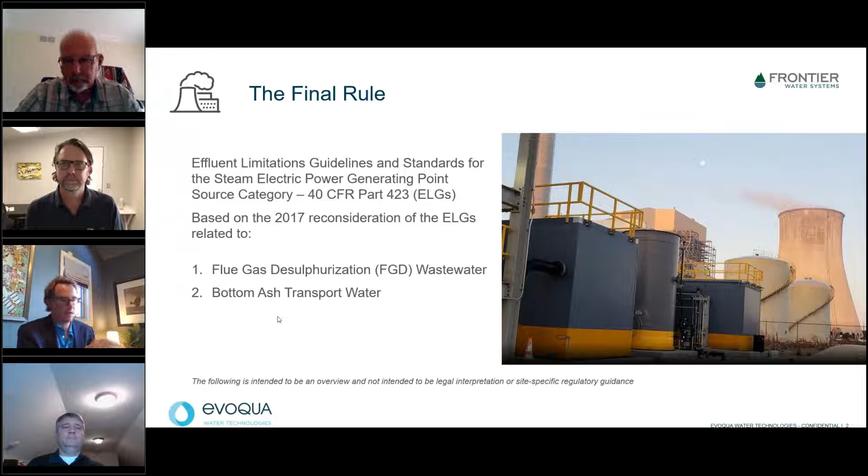A significant change in the rule is the definition of what constitutes a low utilization boiler. The EPA modified the standard from an output value to a capacity rating. The EPA went on to estimate that this would change the viewpoint for 66% of the utilities who are planning to use this exemption. The rule maintains the exception for very high flow systems, although there are very few of those, and those have committed to retirement by 2028. We confirmed the option for adopting tighter standards as part of the voluntary incentive program, based again upon the adoption of membrane-based technologies.

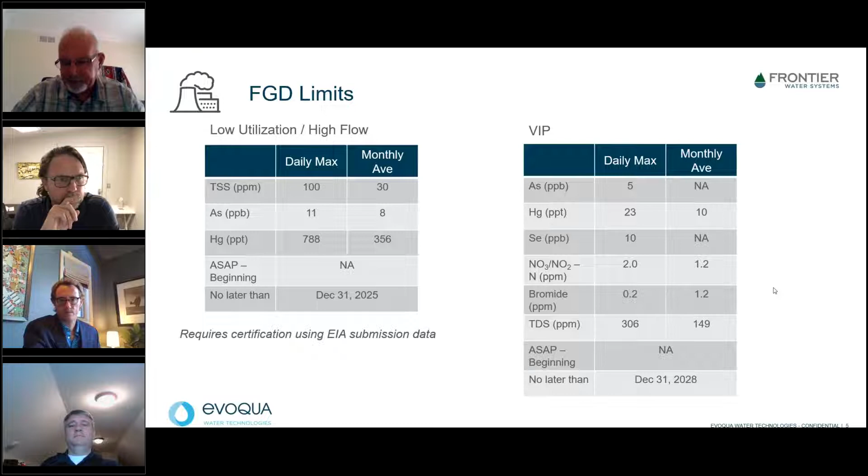While maintaining the recommendation to use membrane-based technologies, the EPA commented, while there are many pilots underway, there is not a full-scale system operating in the US at this time. An additional comment was that more development is needed to handle the brine waste generated by this approach. Now I would like to turn it over to our colleague, Kevin McDonough from United Conveyor Corporation, to discuss the rule's impact on bottom ash transport water.

Chuck, can you hear me? Yes, we can. Okay. I'm going to jump into this, and we're just having a few connectivity issues, but we'll roll from here. All right. Thanks, Chuck. Appreciate it. Thanks, everybody, for joining us today.

One of the things that we wanted to touch on was just showing the intent of the EPA to have some harmonization between the coal combustion residual rules and the effluent limitation guidelines, specifically as they pertain to bottom ash transport water. So one comment I want to make is some of the urgency that's noted about that new cease receipt of waste deadline of April 11th, 2021 for formerly clay-lined or unlined impoundments.

As those of you that understand what the timeframes typically are for these projects know, to complete a wet-to-dry conversion project in 6 months is borderline impossible, if not impossible. But obviously there is an application for extension for a longer time period that reaches out to 2023 or 2024. So that being said, it goes into the ELG, which is also expressing some urgency of as soon as possible, but not later than December of 25. And obviously a lot of those details are going to have to be worked out with the permitting authorities.

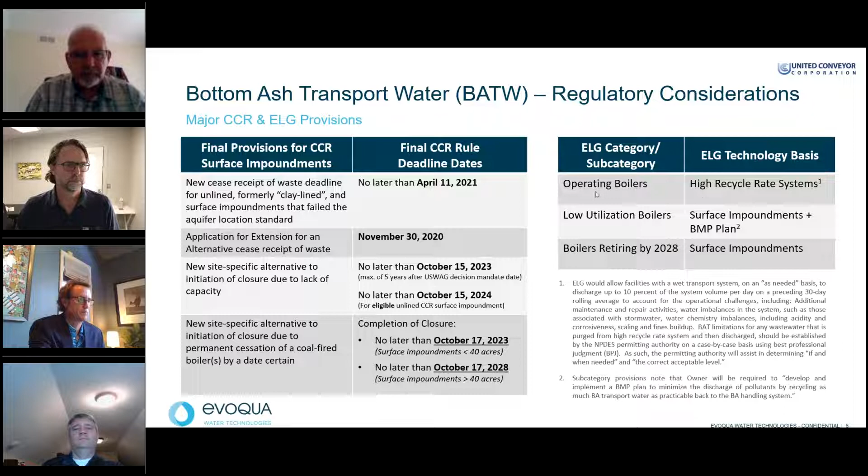And of course, in the last group, the boilers retiring by 2028, you can continue to use your surface impoundments, provided your surface impoundments are in compliance with the CCR rule. So switching over to some of the solutions, and I won't go into too many details on the next slide, but as most of the individuals that have done work on or gotten into the preliminary phases of bottom ash projects know, we have a number of options for bottom ash transport water wet to dry conversions, which would provide for CCR and ELG compliance.

About 75% of the fleet is done, pretty close to that, and I think the EPA stated that in the final ELG, and that's consistent with our record. So there's a large amount that's been done, and a lot of operating references, but still a fair amount to do.

So we've just listed some options here that I think many people are familiar with: the submerged flight conveyor, which is an under unit drag chain conveyor; the high recycle rate, which is a recirculation system with provisions for blowdown. Of course, high recycle rate can be remote SFCs, dewatering bins, or even concrete basins, where we can recirculate most of the water, but again, include provisions to blow down up to that 10% of the bottom ash transport water.

The clarifying hydraulic system is a variation on the theme, which polishes the water a little bit more cleanly than a typical recirc system. In particular, we can do clarification down to 100 ppm TSS daily maximum, 30 ppm 30-day rolling average, which is consistent with most NPDES discharge permits. And of course, the last options are dry pneumatic or mechanical.

One thing I wanted to touch on was our latest offering, our Mobile Max system, which is a hybrid of some of the SFC and high recycle rate system options that we've done in the past, but it's mobile. And of course, the primary motivation for us looking into this was, first, how do we reduce lead time? Understanding there might be some urgency, as I mentioned earlier, about complying with the CCR rule, getting off the pond quickly, converting the systems from wet to dry. So how can we cut lead time?

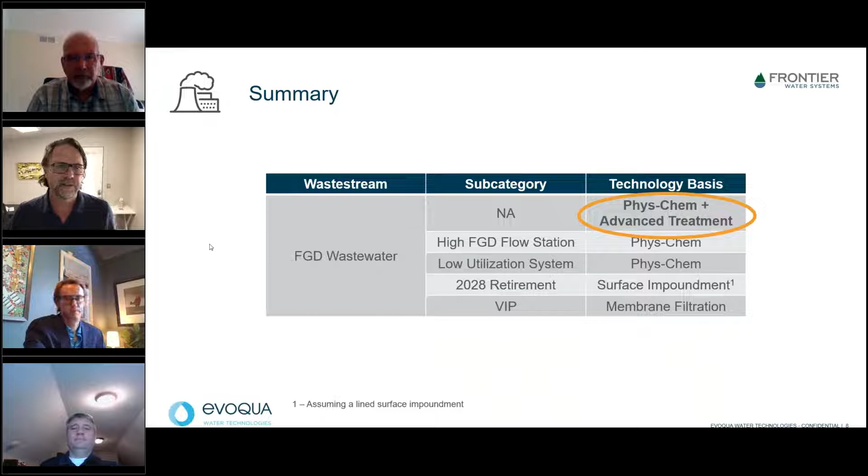I'll be discussing the treatment technology basis behind the ELGs for FGD treatment. Next slide, please. The effluent limitation guidelines for FGD treatment are based on multiple water treatment systems working in concert. For most coal-fired power stations, this means physical chemical treatment followed by biological treatment with fixed film bioreactors and polishing with ultrafiltration. Most utilities with wet FGD scrubbers already have physical chemical treatment in place. If not, we can help or provide guidance on upgrades towards ELG compliance. What's new for most utilities is the integration of fixed film reductive bioreactors and ultrafiltration to meet the new limits in regards to nitrate, selenium, and mercury.

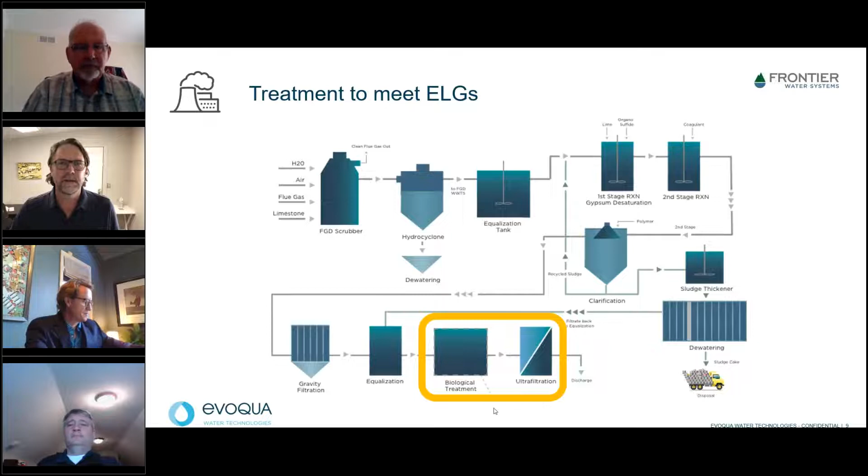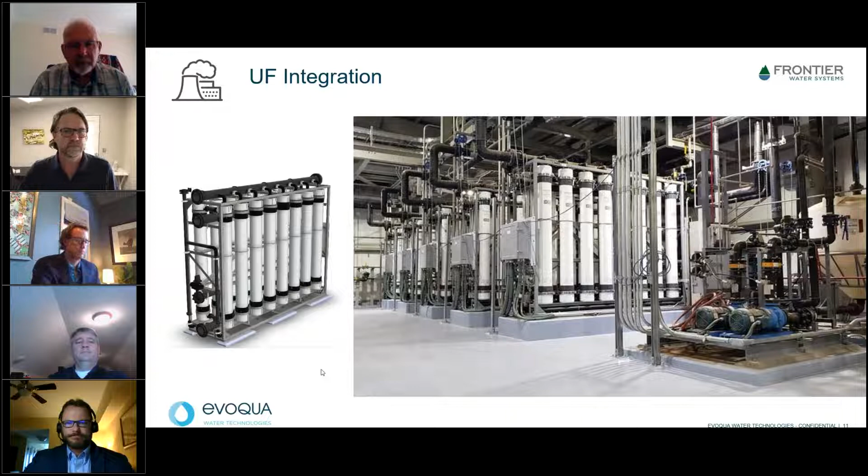Next slide, please. A complete ELG treatment system requires ultrafiltration as a final step to remove colloidal particulates that are precipitated in the upstream processes. UF integration needs to be done properly to work in this environment, and Frontier has pioneered this application. Again, it is the combination of well-run physical chemical units with biological and UF that are required to meet the ELGs. In fact, the numeric values in the ELG limits are based on this complete treatment scenario. Next slide, please.

We're pretty busy these days with proposals, and we'd like to engage any utilities in helping them understand their compliance options. So what we need for that is basically a kickoff phone call and some communication around water chemistry, flow balance, utilization factor, what existing treatment units, what phys-chem units are on site, and of course the compliance schedule.

So with that, right now we like to have about 30 days time, but we can furnish a pilot test plan. We don't always need a pilot. We often recommend it, but if we're comfortable with the water chemistry, we may skip that and compress the timeline. But we'll have a budgetary proposal with equipment costs for the bio and UF, a detailed scope of work, and GA drawings and a process flow diagram of the system. So you get a good idea of what it's going to take economically to comply with the ELGs.

Next slide, please. So based on the compliance schedules laid out by the EPA, timing is critical to execute a treatment plan for both CCR and ELG treatment. For most FGD treatment systems, we are currently seeing a 24 to 36 month project cycle, and timelines may stretch at peak demand. So time is of the essence here with everybody. I'll pass this over to Max to discuss the nearest deadline, which is coming up as soon as next April.

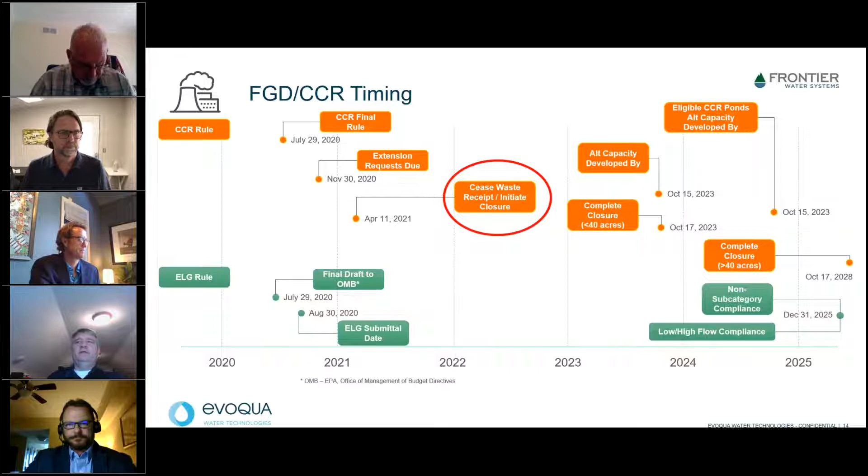Yeah, thanks, Tim. The April 11th, 2021 deadline is connected to unlined surface impoundments. So on July 29th, the CCR rule change affected the classification of the impoundments with clay liners, moving them into the unlined category. Therefore, these ponds are subject to this closure deadline. If your plant needs to divert a low volume wastewater from an impoundment subject to closure, Evoqua can help with that. So let's now look a little closer at that timeline.

So here's a hypothetical expanded timeline for a project starting with today. Meeting the compliance timeline for these projects is achieved using mobile and modular fleet assets. Since many plants may share the same deadline, the availability of those assets could become constrained. With early engagement on scope development, there is time to construct new fleet assets for a low volume system.

The systems can be temporary and used as a transition to a permanent treatment system or as a semi-permanent system until plant retirement. Evoqua has completed similar projects with shorter timetables for customers that had other regulatory compliance deadlines. With over 40 executed projects related to CCR regulations, we stand ready to help you with your compliance challenges. Now I'll let Patrick take it over for any questions that you might have.

I appreciate it, Max, and everyone for that matter. Get my cursor to work here. So listen, it's power lunch, right? So it's a pretty tight window. I know we're all busy, even working virtually,

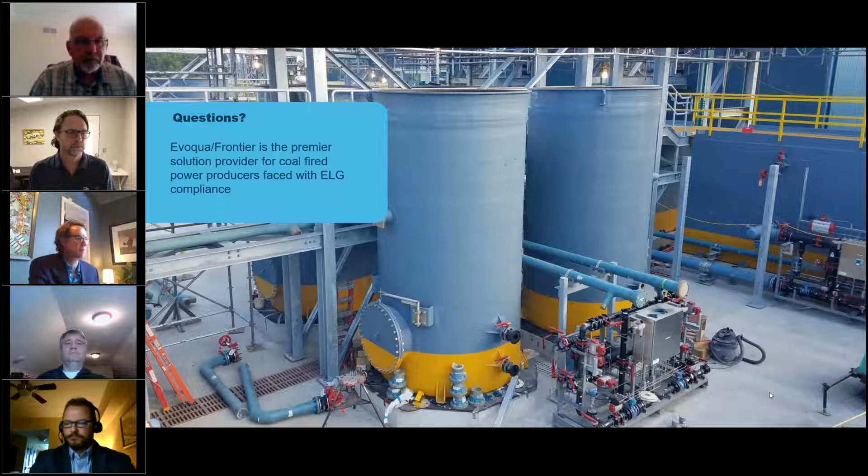Okay, thanks, Tim. The next question, I think we covered this a little bit, but it's worth going back to, and Max, it really speaks to this timeline. If I have a need for dewatering at an ash pond, what's my expected turnaround time to have assets on the ground?

I don't know, Max, can you speak to that one? Yeah, you got me? Yeah, we got you. Okay, so

All sizes and shapes of systems are different, but normal installation to startup of this system is about a month. So you can work backwards from that to delivery schedule and equipment availability. So if the assets are readily available, delivery can be almost immediate, and then work from there.

So larger projects that have higher flow rates, and I would say that's north of 2,000 GPM, where you're going to need multiple assets. Of course, the larger the system, the longer it would take. But a 3 to 4 month window from start to finish is achievable.

Okay, thanks, Max. Just a few more. Want to get as many of these as we can before we hit the bottom of the hour.

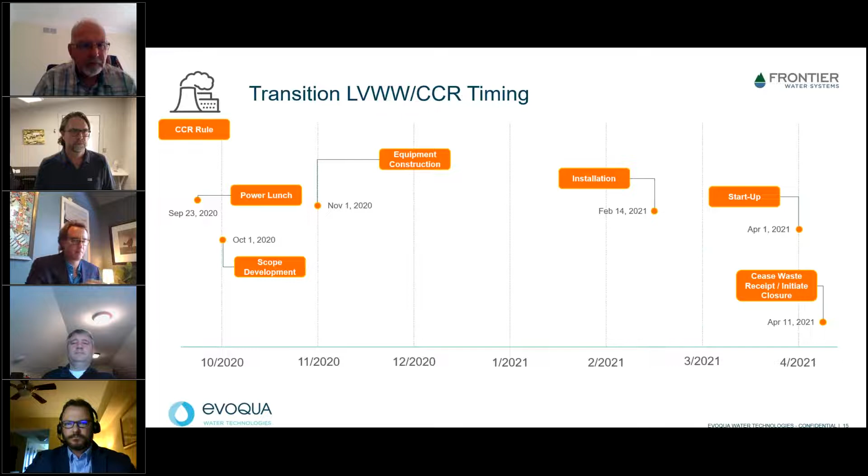But the next one I have here, Kevin, I think this is yours. We look at the Mobile Max system. Out of this configuration you laid out, what's going to go indoors? So the thought process there is almost none of that is going to go indoors. You would find a place where you would intercept the bottom ash sluice lines that are currently going to the surface impoundment, roll that equipment in, intercept those lines, redirect the water.

That being said, we do have a couple of proposals that we're working on right now where the plant does have some indoor storage warehouse space, and we're actually going to move some of this equipment into that unused warehouse space. But the expectation for the most part is that most of this is just going to be rolled out into the open. Interconnecting piping would be put in place, and then you would do your appropriate power connections and chemical feed injections, etc.

For sure, for those plants that are in northern climates and have some freeze risks, we definitely would have some freeze protection that would be part of these systems. A big part of that freeze protection is the recirculating water that keeps moving from the systems. And then for certain things like the SFC head and tail sections, we might incorporate local heaters just to make sure that we don't get ice buildup on the SFC, as well as some of the other equipment.

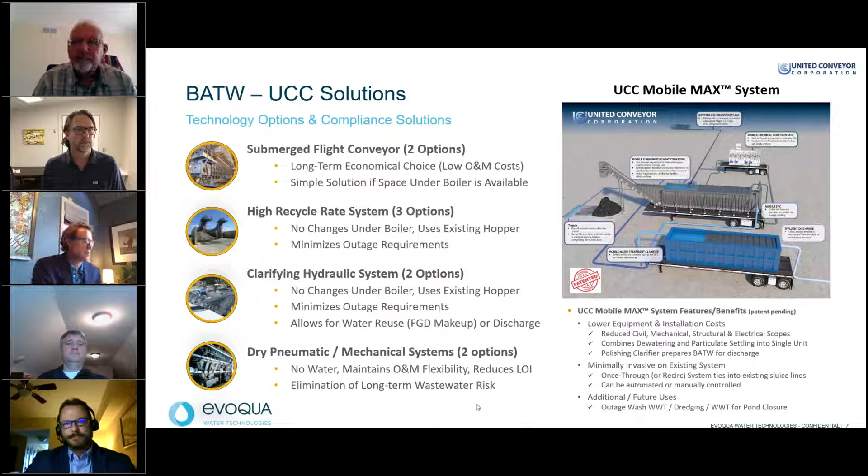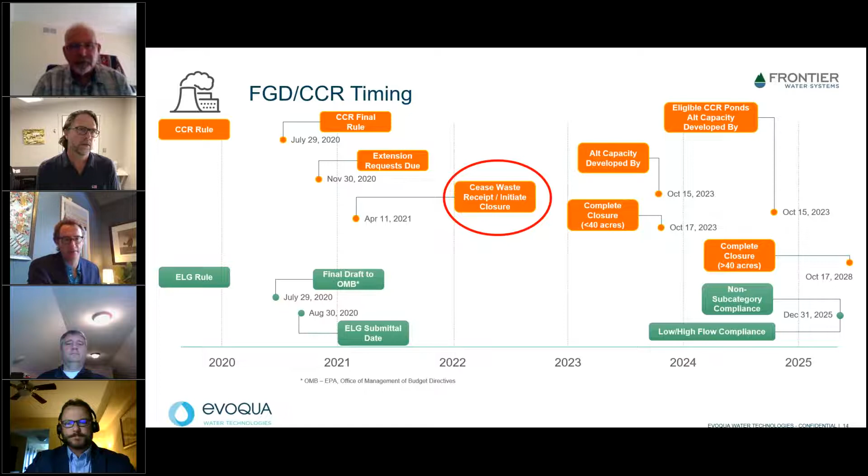Okay. Thanks, Kevin. Next question here is similar to, I think, the question that Max, you answered around the ash ponds, but in short, Tim, this is for you. For the biological system, once the assets are on the ground, what's my expected startup time? And I think this is really rooted in the fact that it's a biological system, right? So how particular are those bugs from your experience?

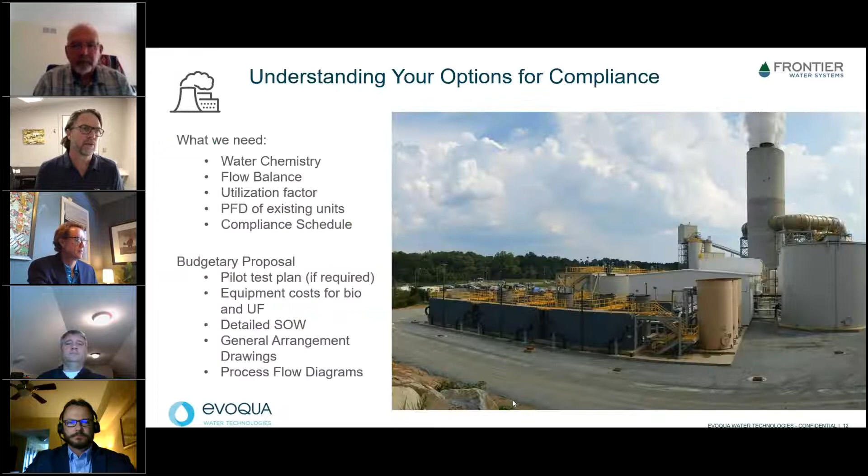We schedule about 60 days from wet testing. Of course, there's a lot of things that can impact that, the construction schedule. But once the system's wet tested and water's flowing and everything's checked out, all the sequences are checked out, it's working hydraulically, we allow for 60 days. We can see results shorter than that. Okay. That's what we schedule.

And then one more, and then we'll do a final sweep of the chat here. What kind of redundancy do you recommend, or have you seen at various installations that you've done? We've done up to 100%, but N+1 is typical. So one redundant train. Okay.

Just do one more check here. I've got 12:28. Okay. I think we are good.

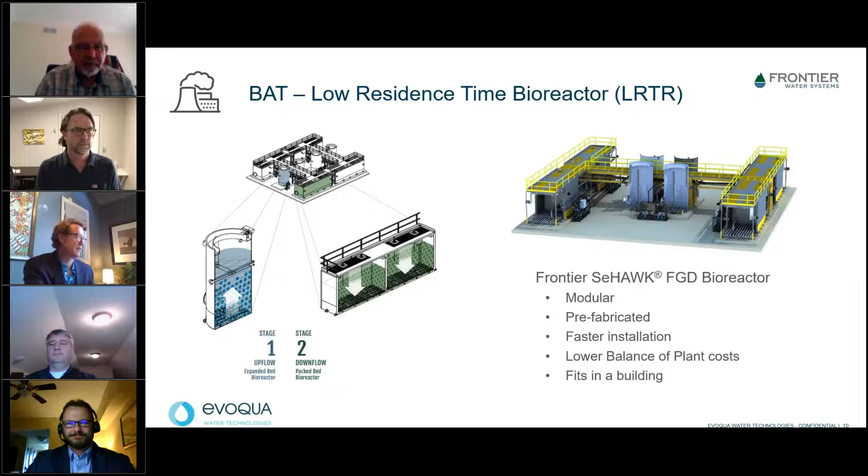Well, hey, team, I don't want to take up any more of your time, but as I mentioned, this was not intended to be a full comprehensive kit on everything you would ever want to know about ELG regulations. But given the time frame, this is an overview. If you don't know these individuals, between Chuck, Max, Tim, and Kevin, these are subject matter experts who are very eager to answer any questions you may have offline.